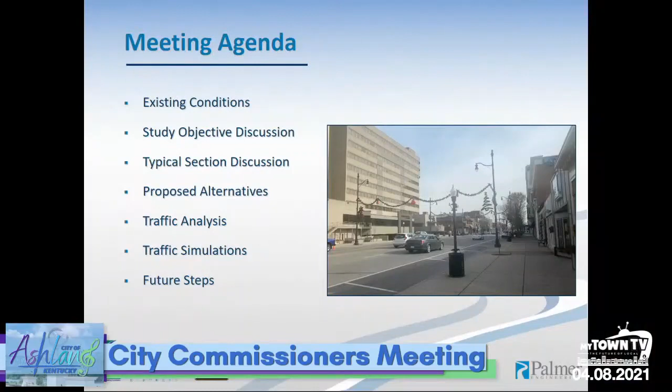What we did was look at what the existing conditions are out there today. We looked at traffic volumes, did traffic counts, did travel time studies of how long it takes to drive Winchester and Greenup today. That would be used to compare with this concept we're looking at. We also looked at crash analysis. I know you all have had some fatalities with pedestrians here, and there's been numerous wrecks at some of the intersections. So we looked at that information.

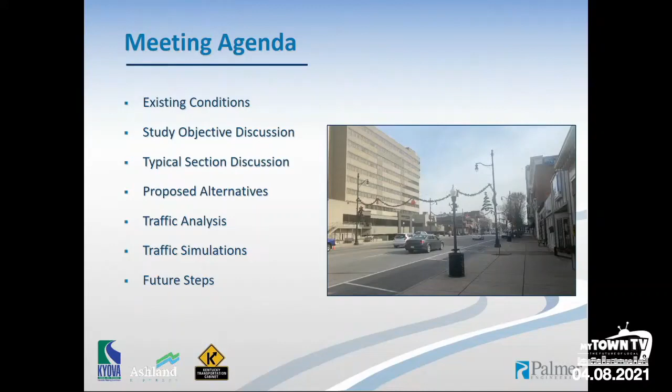And then we took all that data, looked at traffic simulations, all this existing data that we do as engineers, and developed a solution - multiple solutions - that we felt would improve the downtown and meet the goals that you all needed.

So one thing I'll talk about is what was the objective of the study. The big thing is we wanted to reduce Winchester Avenue from 4 lanes to 2 lanes between 13th and 18th. That was the goal, and this mission statement and study objectives kind of came out of our stakeholders, everybody talking. KYTC was involved in this, KYOVA was involved. We also wanted to not impede the flow of traffic in downtown. We still wanted people to be able to get to where they're going, but at a slower, more traffic-calming pace, improving the safety of the downtown area.

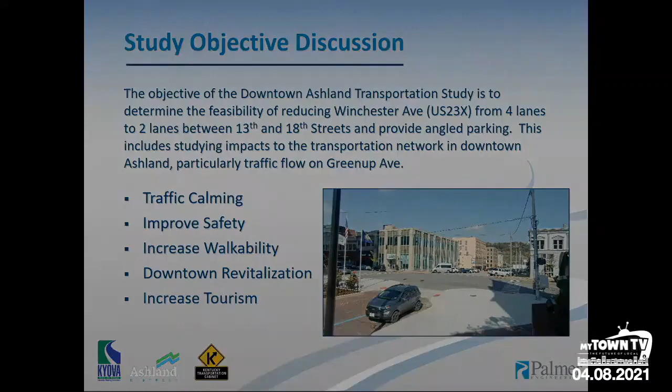We also wanted to increase the walkability of the downtown, which would help with revitalization of the businesses, and then also increase tourism. So this is where we are today. I'm not going to say this won't morph over time, but I think it covers the objectives that you all were looking at. So with that, parking was a big consideration.

How much parking is there out there today? How much is being used? And how much could we increase it, or how much would it stay the same? We want to make sure we at least maintain what we have. So you'll see that there's 3 different levels here. We counted, ultimately in this study area, about 800 parking spaces - 799 to be exact.

You'll notice there's 3 different colors there - green, orange, and red - and those relate to the different ratios of what's there versus what is occupied during a normal business day. We did it from a noon to 1 or 2 o'clock time frame. You'll notice there's definitely a central location where parking is being 100% used, or mostly used, and then on the outskirts you have the green, which is not being as utilized as heavily as in certain areas. Of that, we had right at 200 parking spots that were used.

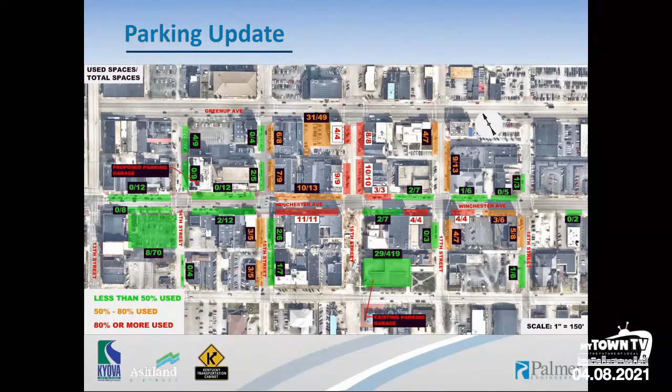Now I will say that we did include a parking garage down in the back corner there on the bottom of the map that has roughly about 419 spots. Today it is private, but we did include that in our study, and only 29 of those were being used, so it wasn't a lot being used there. But that was something we did include.

With the existing data we gathered, we developed two alternatives. Alternative one reduces it to two lanes. It had 14-foot driving lanes and pull-in angle parking, which is more like what you see in some downtowns, where you just pull into the spot.

Then you back out when you're ready to leave. One of the things we wanted to do was increase a bicycle lane through here. With the limitations of the angled parking on each side, we weren't able to get a bike lane in each direction, so we used a sharrow, which gives bikers the same rights as a car in the lane. They would just ride down the road like a car would.

We maintained signalized intersections at 13th through 18th, just like today. That wouldn't change, it would be exactly the same. With that, we did have to look at adding a right turn lane at 13th, just because of the number of people going across the bridge, that was something that had to be added.

As I mentioned, signals at each intersection. We were able to increase parking with pull-in spaces, not a lot, but we were able to do that. We did have bulb outs at the intersections, which will reduce the amount of time it takes for a pedestrian to cross the road. That will provide a safety benefit there.

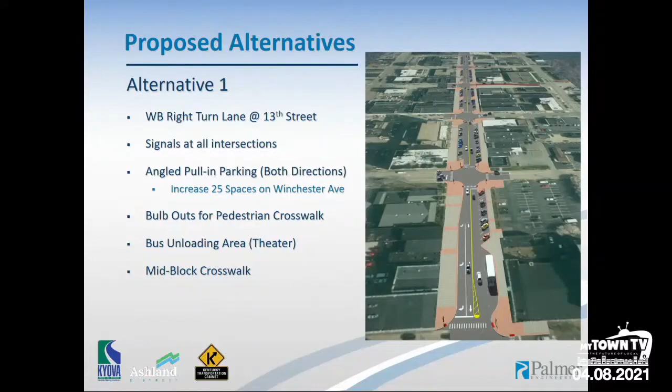We did look at a mid-block crossing on this alternative also, between 15th and 16th I believe. I know this map is hard to see, but alternative one is kind of a conceptual alternative of what the corridor would look like.

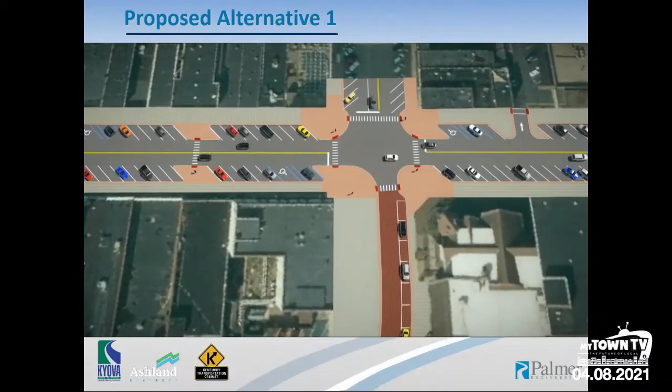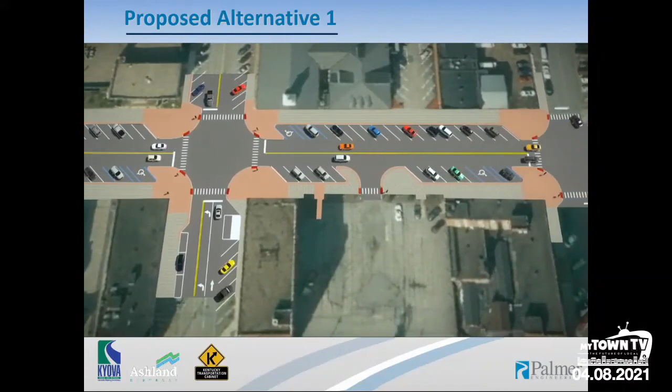Now this is a simulation that shows what it looks like. You'll notice the bus pull-off in front of the theater, and the angled parking. You'll see the shortened crossings where the bulb outs are at the intersections, giving a short pedestrian crossing. As we go down, there's the mid-block crossing we looked at between 15th and 16th, the new configuration at 16th, and as you get down to 17th and on to 18th. This is just a rendering of what you would see with alternative one.

As we go to alternative two, I will say I was a little bit nervous about proposing this at one of our meetings, but I did feel pretty strongly that it would work.

Alternative two also provides one lane in each direction, two lanes total. The lane widths are a little bit narrower than the other one because of the raised median in the middle. This one has back-in parking, which is essentially the same as parallel parking, but easier.

What you do is give your signal. As you come up to the space you want to back into, you pull past it, and just like parallel parking, you back into that spot, but you're not having to worry about how close you get to the curb, you're just backing into the spot. With most cars having cameras today, it's relatively easy.

But the benefit is when you go to leave, all you're doing is looking to your left. If there's not a car coming, you pull out. You're not having to worry about backing out into traffic with some car coming down through there. It's just like leaving a parking space.

There's also benefits for businesses when you're backing in. If you go to the store and buy something you're going to put in your trunk, you come out and there's your trunk right at the sidewalk. You're not walking out into traffic trying to load your car and worrying about a car coming by and side-swiping you or something like that.

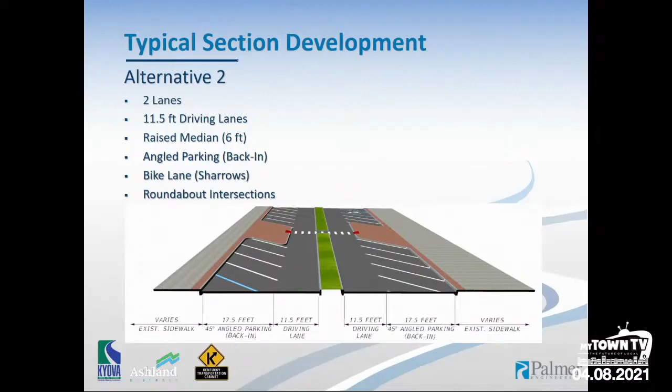There's another aspect of this alternative in that we implemented roundabouts at many of the signalized intersections. This is a rendering of that.

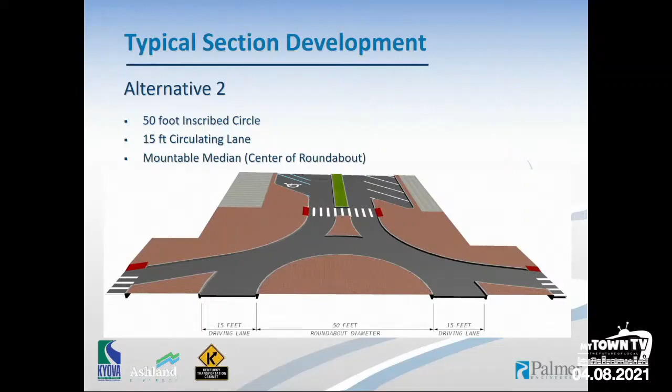They would have a 50-foot circle from outside to outside, with a 15-foot lane for cars to drive around. The median in the middle is mountable, so if delivery trucks want to come up and turn left, they can still do that. The truck drives through the roundabout and the trailer can go up over the median. You wouldn't want to do that in a car, but a bigger truck can. We put those at each of the signalized intersections except for 16th Street.

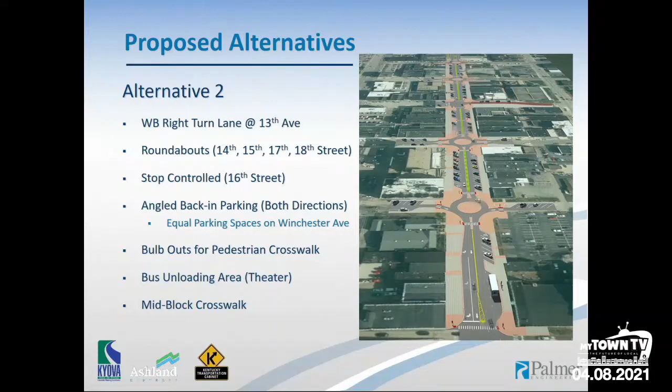Same thing with this one, you have the right turn lane up at 13th. 16th goes to stop control with alternative two, so the side streets would stop but Winchester Avenue would still be able to free flow. We also have pedestrian safety with the bulb outs there, and we had the mid-block crossing in alternative two as well.

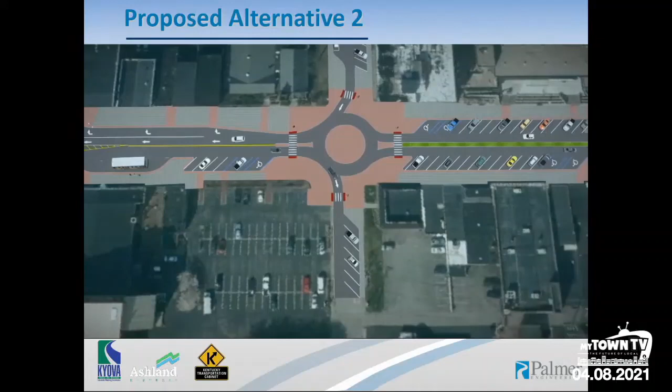So like I said, this is hard to see. We can blow this up if everybody wants to zoom in on an alternative, but this is the same rendering showing what it would look like with the mini roundabouts at the intersection, the raised median, and the back-in parking on this concept.

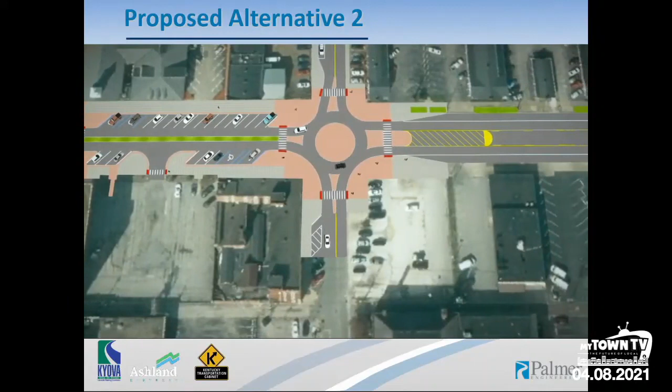One other benefit for safety is door opening. This came up in one of our conversations - if you have small kids, when you open your doors pulling in, the kids can just run. With the old setup, the doors would open and kids could go out into traffic. With this design, when you open your door, the door itself acts as a barricade to going into traffic - they'd have to go toward the sidewalk. So that's another safety benefit for parents with smaller kids.

So we had our discussions internally. As part of the study, we wanted to come up with a preferred alternative, so naturally we call it Alternative 3. Alternative 3 is very, very similar to Alternative 2, just minor differences. I'm no Vanna White, as you can tell - your job is safe.

With Alternative 3, there are really two separate areas that are different. One is between 13th and 14th. What we've done is added parallel parking across from the theater, along the hotel, where there's existing parallel parking today. The other thing we've done is taken 14th Street and converted it back to two-way, with parallel parking rather than pull-in parking like there is today.

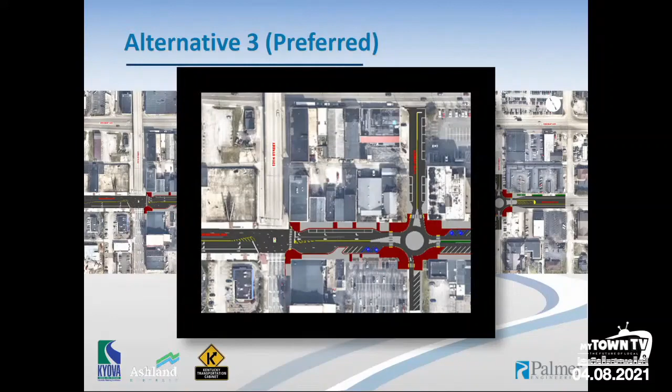The reason for this is that when we started looking at traffic volumes, there's a lot of traffic in the afternoon that comes up Winchester Avenue, hops over, and gets on the bridge to cross. So having through traffic use Greenup more as the through area, rather than going down Winchester - the models don't show that changing much. But if you want to get through the area, you'd be able to come up 14th Street and go across the bridge, or coming off the bridge into downtown, use that to get down to Greenup. We felt strongly that for efficiency of moving traffic, it would be a benefit to convert that back to two-way.

The other area on Alternative 3 is at 16th Street. That was very difficult - we tried to find a way to put a roundabout in there, I tried hard, I promise. But with the new improvements you all have made there, we didn't feel that tearing that out and putting it under construction again was a good thing.

So we made it stop-controlled in Alternative 2. There were some concerns about safety - would people be crossing Winchester Avenue safely, even though it's just 2 lanes instead of 4 now?

So with this option, we've closed that median. If you're coming up 16th Street from Greenup and want to go straight through, you'd make a right, go down to the roundabout, and come back up to 16th. Same thing if you're on Winchester Avenue and want to turn left to go down to Greenup on 16th - you'd go down to 17th to the roundabout, go all the way around, and come back to 16th.

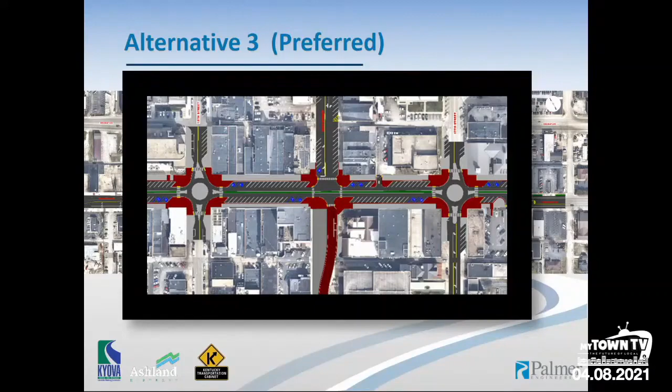This is something we can obviously discuss and refine as we move into final design. This was just another option we wanted to present to try to make the area safe while keeping traffic flow moving.

From a traffic analysis standpoint, I'll hit this really quick. Level of service is the same as grades in school - A is good, F is bad, C is average.

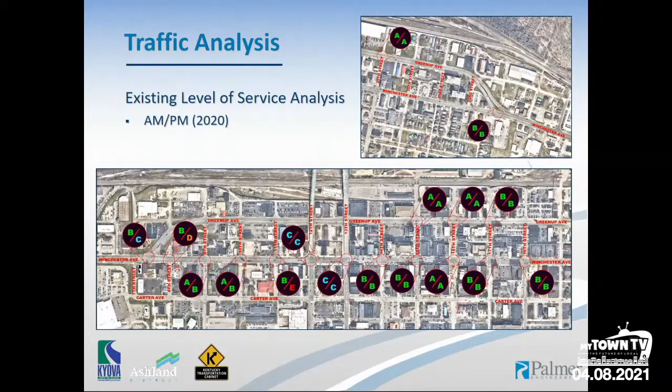It's kind of what our goal is as engineers, to keep everything as a C or better. Everything in the downtown area today is an A or a B, except when you get up to the bridge crossing, where you do get some E's - everybody understands this project doesn't do anything to fix that. This is totally separate, although I'd be glad to help you all fix it at any time.

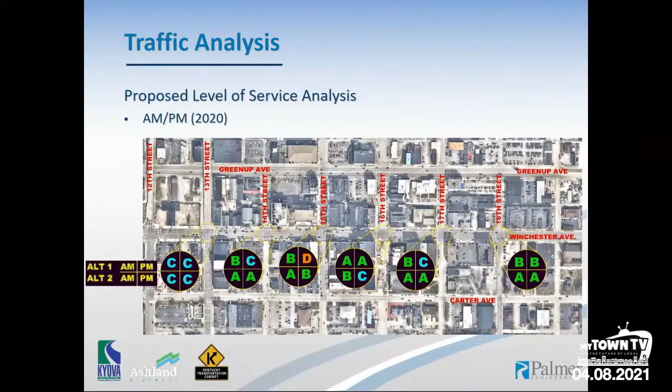So when we reduce it down from 4 lanes to 2 and compare the two alternatives, with signalized intersections you'll notice there is a D at that intersection, but with the roundabouts, everything is an A, B, or C. That D is because there's a significant volume of cars coming up that way, and keeping traffic moving on Winchester Avenue means the side streets have to wait. It's not anything that can't be fixed with either option, but the roundabouts do keep traffic continuously flowing. So from a level of service standpoint, everything is good with either option.

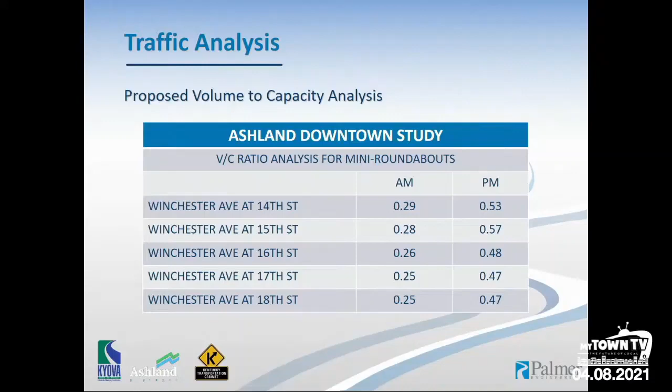From a volume to capacity standpoint, it's based on up to 1, and typically if you're only halfway, this chart just shows that everything we have is below half of what it could handle at a maximum situation. So traffic-wise, it just reiterates that traffic is not a problem with what we have.

Now we have 2 simulations here. These are the PM, in the afternoon. We did traffic counts in the morning and in the afternoon, and the PM was by far the busiest.

What you'll see here is the PM starting where the split is at the northern intersection, coming down. We'll go to the bridge in just a minute - you'll see the congestion there. Then it shows the 2 alternatives and how traffic would flow in the downtown area with these proposed changes. There's the bridge location at 12th and 13th. You'll see the cars queue up to turn left onto the bridge, queuing back through 12th Avenue.

And then with the signalized alternative, you'll notice that cars are having to sit and wait. So if you're on a side street, you're sitting there waiting to get the green light. There's not a whole lot of queuing, it's just a matter of sitting there waiting. As we come down through 16th and 17th, it'll spin around. But you still see that reducing it down to 2 lanes is not going to cause traffic congestion in the area, which was the important thing the Transportation Cabinet wanted to make sure of.

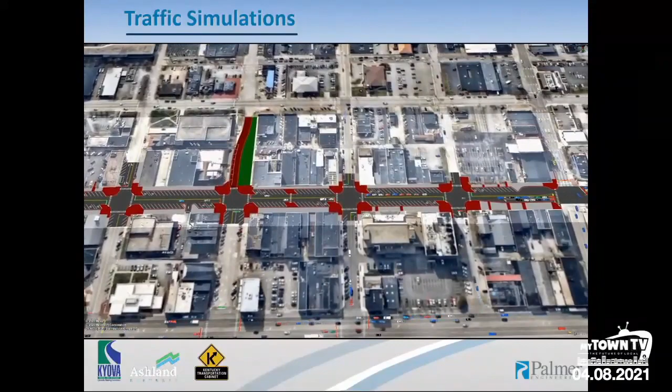I will say with the growth rate and everything, historically the volumes have stayed relatively the same over time. So that is something we did use here. I think as you're all talking about today with the revitalization, hopefully those volumes increase, but there's still plenty of capacity - even if you doubled traffic for 20 years in the future, it would still work.

Just one point to reiterate - we'll wait for Ken to take the question - those cars moving on that simulation, that is real data, measured data. We collected the traffic counts in the field, put those into here, and yes, that's real. Those volumes are real-time volumes.

I will say they were collected during COVID as part of this, but one of the things we did was gather volumes for the whole week and compared the daily volumes to the previous year and two years before - there was a little drop, but we did wait a bit until things returned to normal.

All right, so here is alternative 2, same simulation, same times. All this area up here on 9th and 10th, nothing changes - it's all the same.

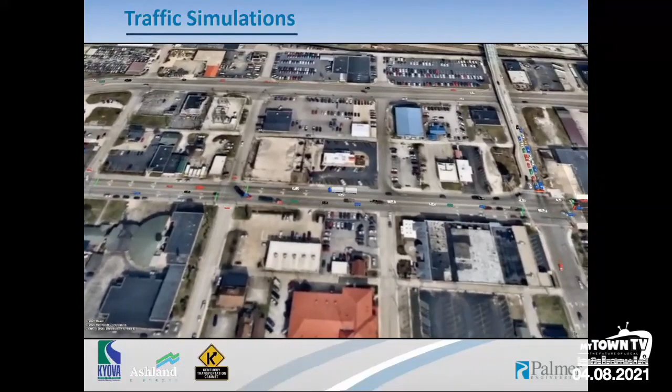I think the exciting thing is when we get down to just past the bridge and you see the roundabouts and how traffic is flowing without sitting there waiting for the light to turn green. As we go through, you'll still see that there is a backup from the bridge at this area - there's the bridge, 12th and 13th.

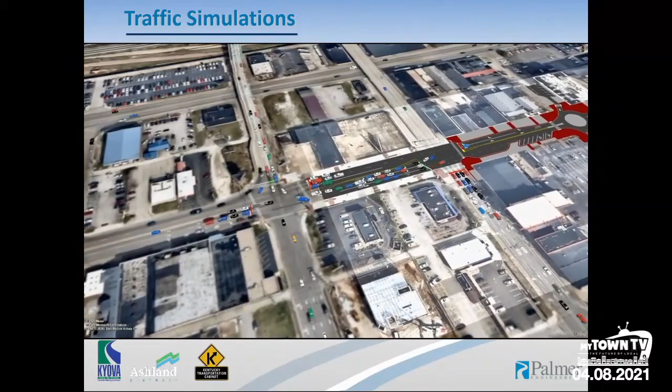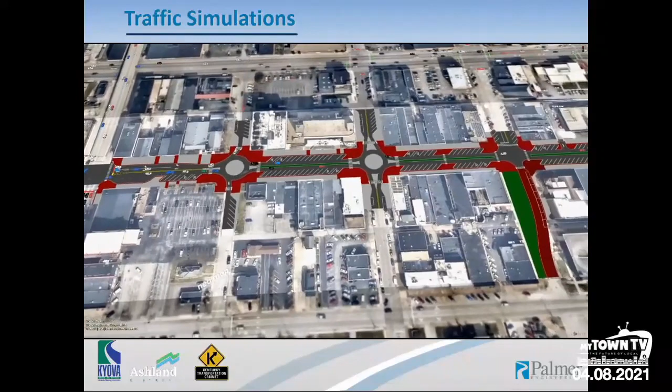And then you have the roundabout at 14th and 15th that show up there. You'll see this one leaves 16th open. It does keep that median open there on this alternative.

But you'll notice there's on the side streets nobody waiting. If we could zoom in a little bit, you would see the cars pull up, just yield for a second, and then go. And then it will pan around and go back up just like the other one did. But with this alternative, essentially nobody is stopping. Everybody is continuously flowing through the corridor.

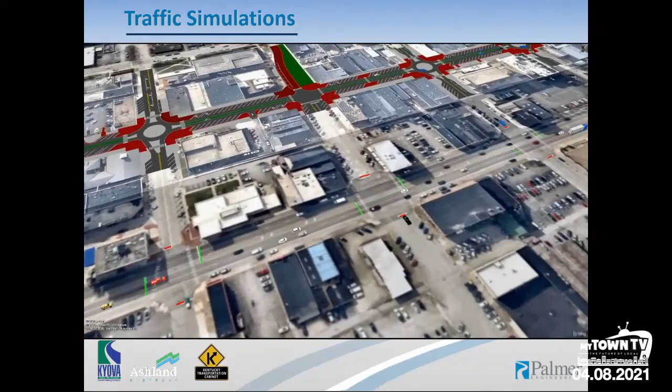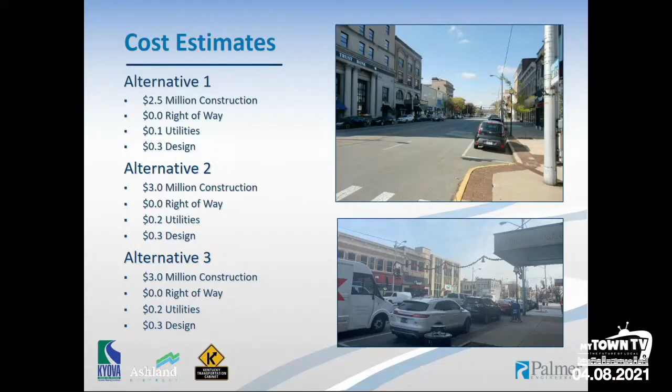So the big question everybody asks is, what is the cost? What you'll see is that alternative 1 is slightly cheaper than alternative 2 and 3. Alternative 1 is roughly $2.9 million if you add right-of-way, utilities, and design in there. The total cost of the project would be right at 2.9. With alternative 2 and 3, you're at 3.5. So it's a little bit more expensive, and that's due to, with alternative 1, you're not replacing the signals -- there's not as much work there to do. Utilities, there's a little bit of impact, and the design is essentially the same, but there is no right-of-way with these alternatives.

Where do we go in the future? I put these in here as some steps of where to go. The final report has been completed. It's been submitted to the KTC. It's been approved. So the next step would be either doing an encroachment permit with the Transportation Cabinet, doing an MOA with the Transportation Cabinet, and obtaining the funding. We have discussed numerous funding opportunities with this through the Transportation Cabinet, through KYOVA, through your all's local funds also. And then to do the design plans, and then get to construction bidding, and then the exciting part of seeing it built.

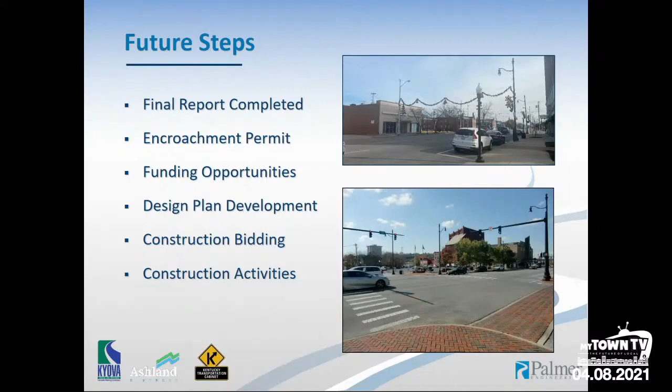I want to ask, this might sound silly, but are the centers of those circles raised? People will be able to drive straight through them, right? No, they are raised. Now, they're raised about -- typically your curb if you're driving down the side of the road is about 6 inches, vertical curbs. These would be at an angle, and they would raise anywhere between 4 and 6 inches. So they're raised enough that if a car drove across them, you wouldn't want to do it. But if a truck wants to track up on it, like a big truck with a trailer, it would be able to go up on it and go around.

Steve, can you also mention the air quality impact of roundabouts versus stop signs? So we didn't do a full air quality analysis as part of this study, but all research shows that with cars continuously moving, not sitting there, not exhaust fumes going in one spot, air quality would improve with the roundabout option over the signalized intersection. I know you all have to maintain your attainment and all that, so there is a benefit for the roundabout and alternative 3 from an air quality standpoint, which is important for downtown with people walking through the area.

And did I miss anything, Michael, Steve? Covered it. I had one.

I did want to add at least one other thing. Simultaneously looking at this, and again, very cautiously optimistic, Mayor, Commissioners, and to the community about funding on this -- I alluded to the fact that some of the initial meetings with KYTC were interesting. They were interesting because KYTC gets paid to move traffic, and they've got something here, as Steve said, that they rate very highly on. So we understand their desire to do that, and I think there was some cross-body language at those first meetings. But I think when they looked at the data, like Commissioner Bland is talking about, I think it's something we knew intuitively, or people that have lived here know the power of Greenup Avenue as a true bypass, and also the fact that Carter is no slouch itself when it comes to moving traffic.